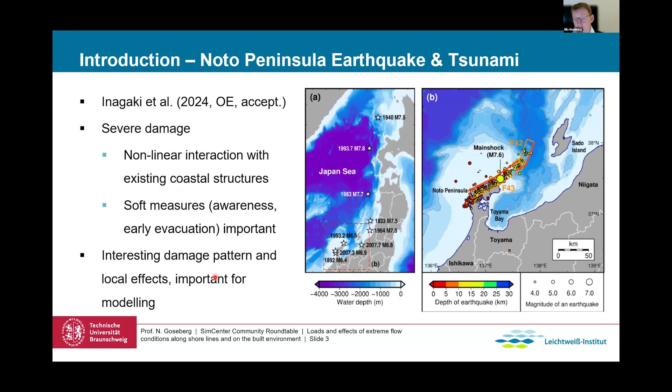Next picture taken at Ukai fishing port. I think this fishing port was also in the media quite a bit. What you see here is where the wave came from left to right, and led to some elastic or plastic deformation of that production facility. You also see a top-down house that was a residential building before, pretty much intact but upside down, and then it hit into that production facility.

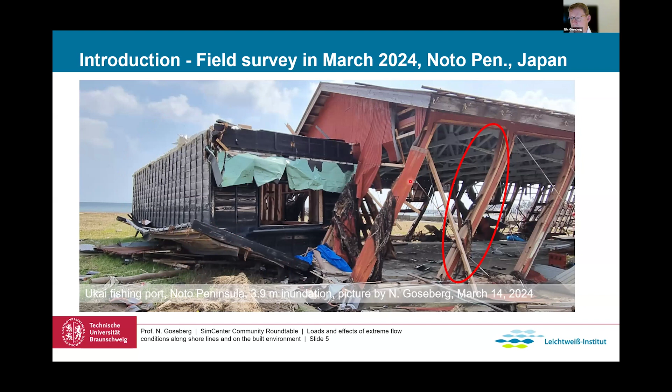So all of this, I think, is pretty important in terms of tsunami modeling. The quick section summary: the field evidence is important, and it needs much greater attention in order to bring what we find in the field into our labs. The built environment is far more diverse than what research currently covers.

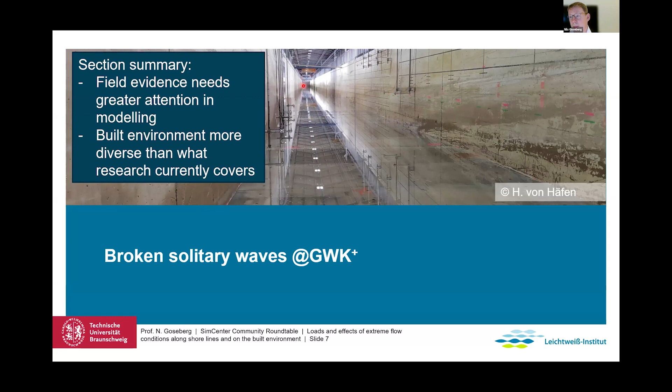That brings me to the first bit of research I wanted to share with you, using our large wave flume in Hanover to produce broken solitary waves. What you see here is a picture just downstream at the very end. You see the wave maker, and in the back of that photograph is a composite bathymetry that you will see next.

So the research was motivated by this kind of setup: consider a very steep mountain and a landslide, which results in a short tsunami, not the type of earthquake-generated tsunamis, but something rather short. We wanted to model the composite bathymetry consisting of a sloping beach and then a horizontal plane.

Method-wise, we used the large wave flume. In terms of producing the hydrodynamic features, we used a solitary wave that, by climbing up the slope, at some point broke close to the edge, and then propagated as a broken horizontal flow that impacted some buildings and features. Very quickly, this is about a minute of video showing what the facility is like.

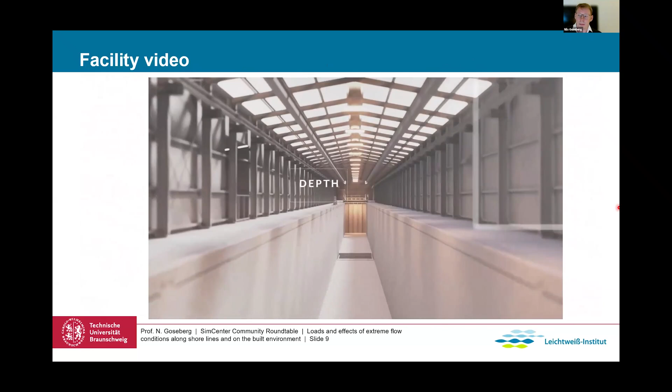A large wave flume, or large wave and current flume, since a year ago. It's a facility that we are flying through now; it's 300 meters long, 5 meters wide, and 7 meters deep. It is equipped with a wave maker at one end. You see it here in action, with a 7.5 meter stroke. It can generate 3 meter wave heights, and it's servo motor driven with active wave absorption.

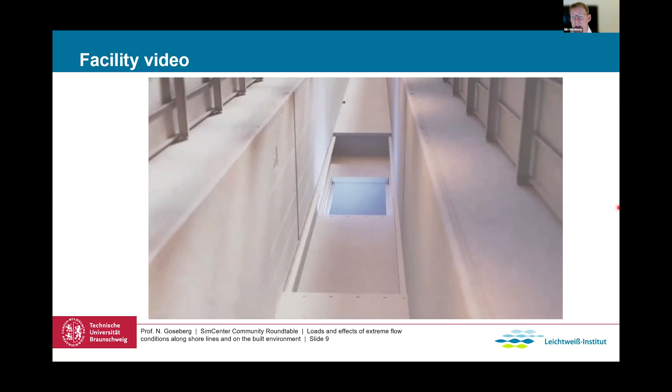Two other main features of the flume: first, a current generation system that can generate either following or opposing currents with respect to the waves. It's about 20 cubic meters per second discharge to generate a flow of maximum 1 meter per second. Last, we can also put structures into the flume in the so-called deep section. It's staggered, 2 meters deep in most parts, and up to 6 meters deep in the deeper deep section.

And we use this facility to do the research that I'm presenting today. Now, back to the research of Hajo von Häfen, the PhD student who led the work.

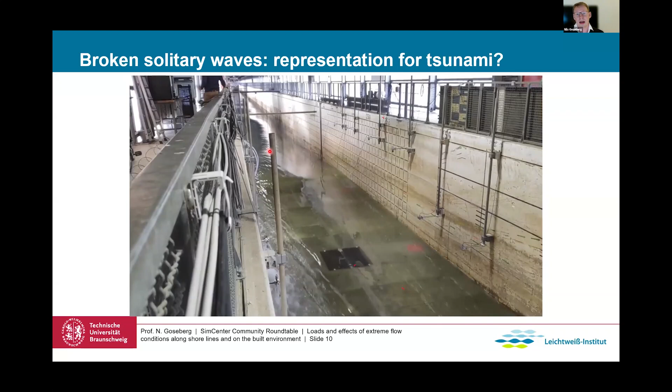I want to show you a video of what the wave looks like. You will see when I start the video that the wave is starting from here, a solitary wave shortly before it breaks. I let the video run. You can see the breaking process, and then after breaking, you see a sustained flow that resembles a tsunami on-land flow in our flume facility.

Just a couple of examples of the flow depth, surface velocity, and momentum flux. Some of these quantities we derived with sensors, wave gauges, but the surface velocity was derived from overhead cameras like this one. Images were stitched together, and then a surface PIV algorithm with popcorn, like from a cinema, was used at very large scale to produce these kinds of surface velocity maps.

If we then look at 3 different locations here on the right-hand side, you see the time history of the flow depths. For that particular test case number 6, up to about 20 centimeters at maximum, the surface velocity at 3 different locations - and you see this does not coincide with the maximum water depth - and the resulting momentum flux that you see here.

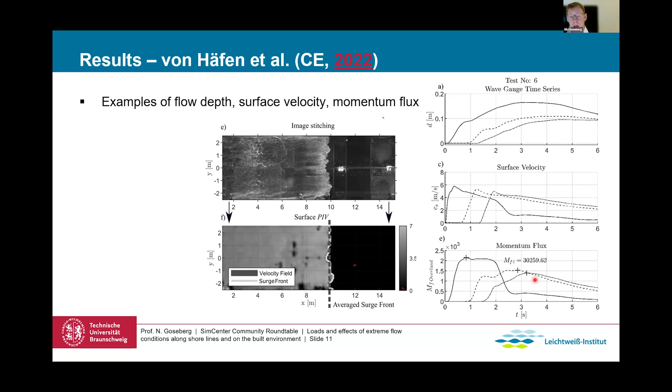It's also clear there is no coincidence between either maximum flow or water depths in that case. Because this was complex over that horizontal surface, we came up with some prediction equations that are summarized in the publication, both for flow depths (first equation) and maximum momentum flux (second equation).

And you see that both are dependent on the nonlinearity of the wave, the freeboard - that is the elevation difference between the mean water level and the platform elevation - as well as the coordinate x, the distance from the forward edge of wave motion.

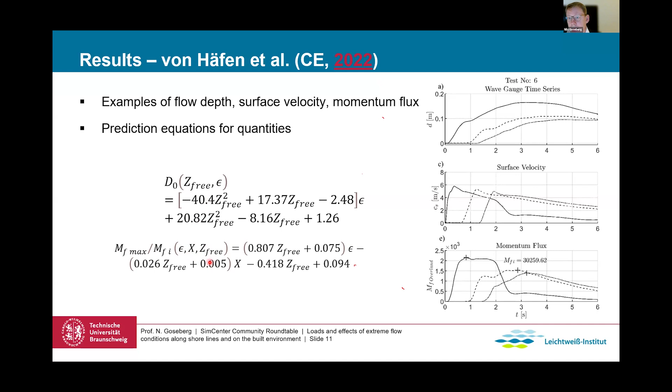So, quick section summary: the large-scale facilities help us produce data sets to model tsunamis and also provide data sets for verification of numerical models.

We have to admit, though, that the broken solitary waves in many cases are too short if we look at earthquake-generated tsunamis. For that, I'll show you at the end of my talk what we are doing or planning to do with respect to these longer hydrodynamic events.

Next part of the research is about extreme flow conditions and building specimens, based on two publications by Clemens Krautwald, another PhD student of mine and now postdoc in the group, who looked at the same hydrodynamic conditions I showed before, but now interacting with buildings.

This was motivated by the observation that in the field we often see collapsed structures, or elevated structures where the flow has a very different flow pattern than what we usually see.

If we look at the wooden buildings I showed in the beginning in Japan, there are still several knowledge gaps, in my opinion, with respect to debris production and evolution over a plane, and also momentum transfer. And with elevated buildings, we also have uncertainty about what happens if the building is partially elevated from the ground.

This also has some uncertainties with respect to uplift, loading, and so forth. Same flume - the large wave flume - two photographs of the specimen and what it looked like.

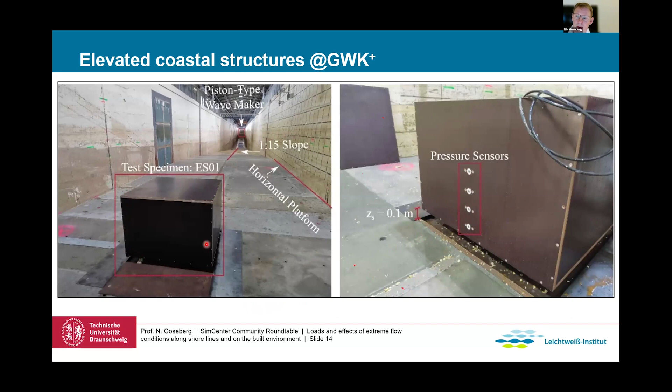You see here a slab-on-grade configuration on the left, and then an elevated configuration with 10 centimeters above the floor. You see pressure sensors, the whole structure, and I'll switch to the next slide.

The full structure was on a multi-axis sensor for load measurements. We had a couple of wave gauges and also an ultrasonic distance sensor for getting the water depth close to the structure.

The difference between slab-on-grade and elevated structure: if we look further offshore, we don't really see a difference, and I think this is not surprising - there's no immediate effect on the building with respect to offshore locations.

But it starts getting more interesting as we go closer to the structure, and you see that a little further away there is actually a bit more water depth for the elevated structure.

But when we go very close to the structure, we see that for the slab-on-grade structure, where the flow can't go underneath, it produces a huge splash up of about 1.1 meters, and a totally different time history of flow depths close to that location.

And if we go to the other side, the backward side of the structure, we see there is also a big difference with respect to the splash up that happens when we have the slab-on-grade structure.

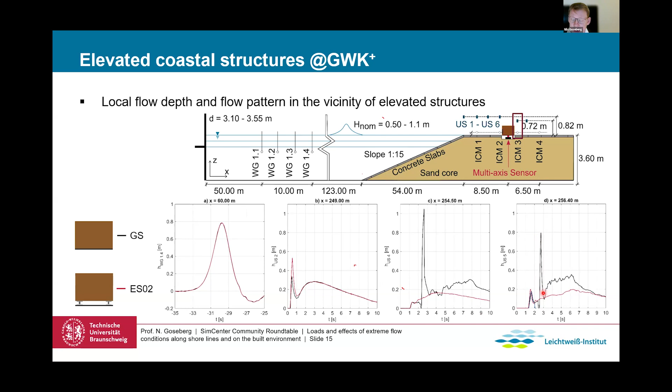So, very diverse flow pattern and spatial distribution, also temporal distribution of the flow depths. If we look at the different processes - slab-on-grade at the top and elevated structure below - you see that through this gap, the flow can just pass underneath.

For the slab-on-grade, we see a horizontal pattern of flow redistribution and shielding of the buildings in back. All this is, I think, very important with respect to the second and third row of buildings close to the coastline.

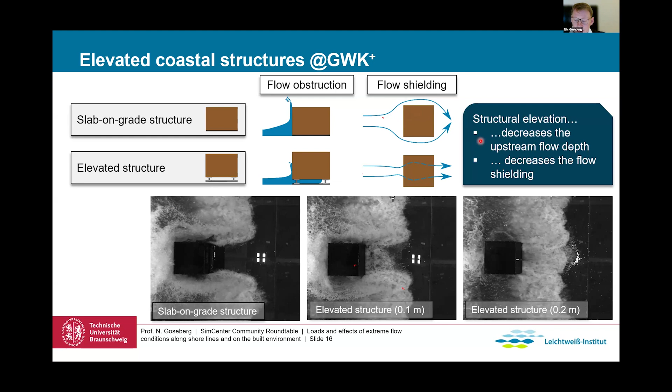Last, let me say a few words about structural collapse, since that was what the second publication was about. I'll show you three videos of three different collapse processes, which we were able to identify in publication number two.

First, there is one where the front studs of the box gave way - the box is scaled such that it can collapse. The front studs were giving way.

And if we look at the video, you'll see the wave coming in, slowed down a bit. First you don't see much, then the wave is breaking into the front, hitting the back wall, which is then pushed out, and the roof is failing.

And you see quite a bit of debris production towards the right-hand side.

The next collapse process we identified was an insufficient transfer of tensile forces, in particular at the backward side, with respect to the connection between the back wall and the roof. Quick video to show you how that looked like.

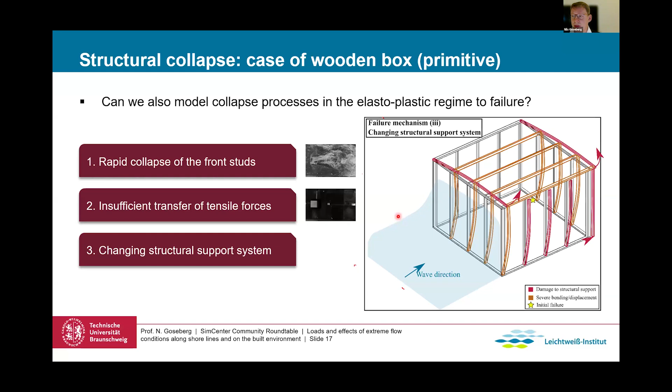Last, a change in the structural support system, and I think it's best explained if I show it this way. You see a rotational motion once the collapse is initiated, rotating torsionally around its vertical axis. Less debris produced, some of the parts are still hanging in here, and this was also a process we observed a couple of times during the experiments.

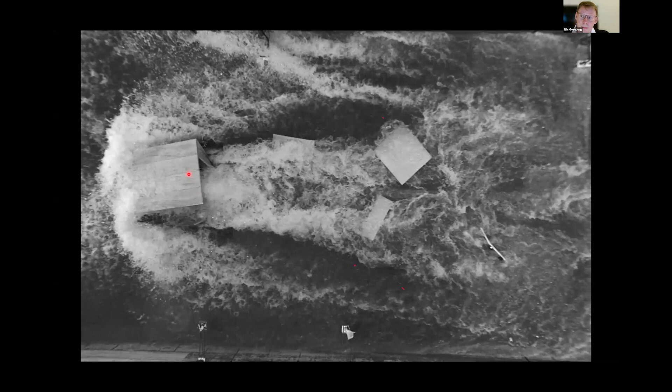Section summary: modeling collapse is possible. However, scaling considerations are still a frontier that need to be tackled next.

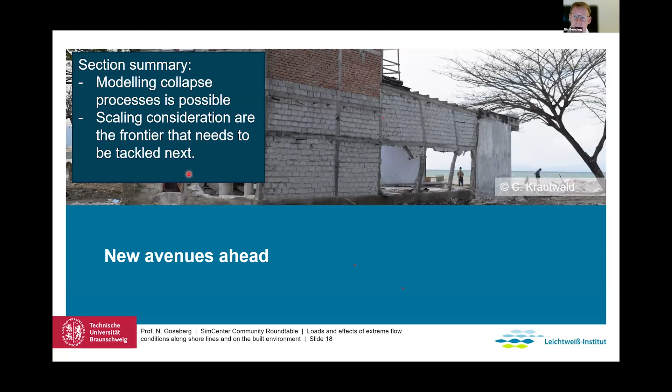Last quick two slides, and I'm done in two minutes, Mike. I hope this is okay.

So what is next? The avenue for the research program that is coming. The predominant problem, in my opinion, is that we need to simultaneously scale hydro and structural processes, which is a big frontier. And we also need to understand and compare physical experiments at different scales, say in mid-scale facilities and in large-scale facilities.

This so far has not really been addressed in research, and a requirement for this kind of question is you first of all need to have equipment in a mid-scale and a large-scale flume. So what is going to happen in the large wave flume is that we are purchasing a big dam break gate.

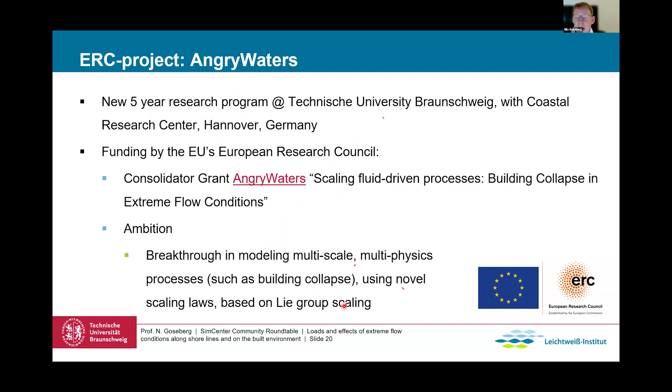Summary and conclusion. I think what I tried to show today is that combined modeling of fluid and structure processes is possible, it's feasible, as long as you have appropriate facilities. And the challenges, as I said before, are in particular in scaling tradition and the strategies between the different fields, structural engineering, hydraulic engineering.

Aside from the physical modeling, I think there is a big need for advanced numerical models, both for multiphysics and multiphase, as well as for more efficient fluid structure interaction. And with that, I'd like to thank you for your attention.

Well, thank you very much, Nils. That was very interesting stuff, and I think it motivates why we're here really well. So...

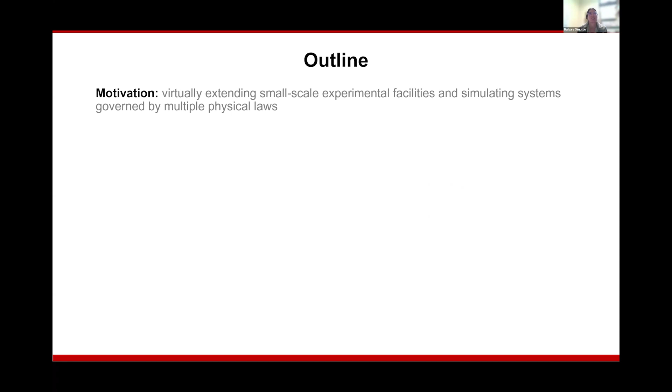I'll go into the motivation, which is the idea of having small scale experiments and simulating these systems that are subject to both fluid dynamics and potentially structural dynamics. Then I'll go into some applications we've studied so far, the unique data generated from that, and ultimately pose questions to get some brainstorming going in this session.

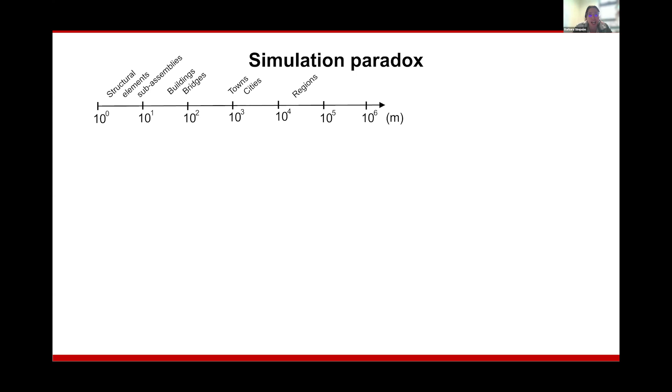So let's start with this motivation. The idea is: if we're going to use our experimental facilities, we're constrained by their scale and capacity. If we're looking at structural components, maybe we could simulate them at full scale. If we're looking at the scale of a building, we have to scale down. And if we look at regional models, we have to scale down even further.

Usually when scaling occurs, you're typically scaling the fluid flow, but oftentimes the structural dynamics is neglected, or it scales incompatibly with the fluid flow. This leads to the simulation paradox: we really need physical model data to validate our computational numerical models, but these physical models may not represent full-scale structural response of the actual structural side of the system.

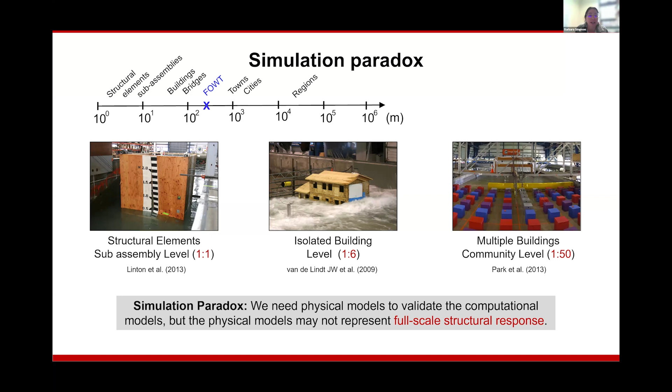I'm going to hone in on a very specific infrastructure type that NSF actually does not fund, but that's the floating offshore wind turbine. That's just because my group has done a lot of work in this area, and it's really subject to this simulation paradox, so it's a great example.

Floating offshore wind is a great example of a multi-dynamical system. It's subject to aerodynamics from the wind, hydrodynamics from waves, and structural dynamics involved with the tower, the blades, the rotor that actually rotates, and the mooring dynamics that keep it anchored. You also have controls that move the rotor and turbine to align it with the wind loading. So there's a lot of interacting effects going on here.

Luckily, if you're looking at say 10 megawatts, which is the estimated floating offshore wind turbine they're going to be building off the Pacific coastline, they're 200 meters tall. So they're incredibly large structures subject to a lot of interacting effects.

So when we think about scaling to look at them in our experimental tests, we want to scale them in geometry, but we also want to scale them in terms of dynamics. That basically means the relevant forces are scaled appropriately. The issue is that when you have these multiple dynamics involved, they don't necessarily scale together all at once.

Here's an example of potentially scaling the wind with respect to the Reynolds number, the structure with respect to inertial and elastic forces, and the waves or hydrodynamics with respect to the Froude number. I'm not saying these are the numbers you should choose - this is just an example.

If you look at a system subject to wind, wave, and structural dynamics, and look at that in terms of time and length - geometrically scaling down the structural system - you can clearly see there are incompatibilities between the governing forces, especially when multiple governing forces are involved.

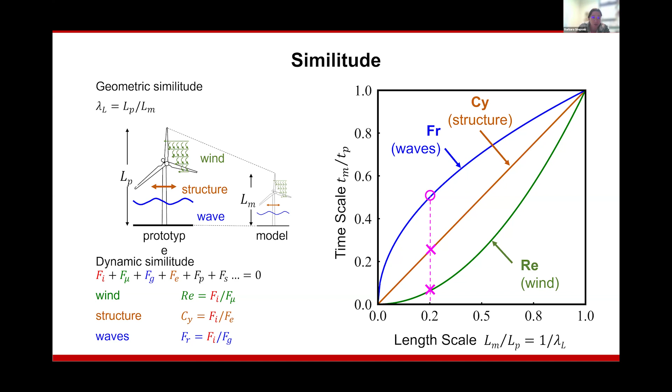There are a lot of these wind wave facilities all over the country and across the world. Not only do they have a difficult time getting a nice control volume near the rotor itself, you also have the wind and waves not scaled appropriately.

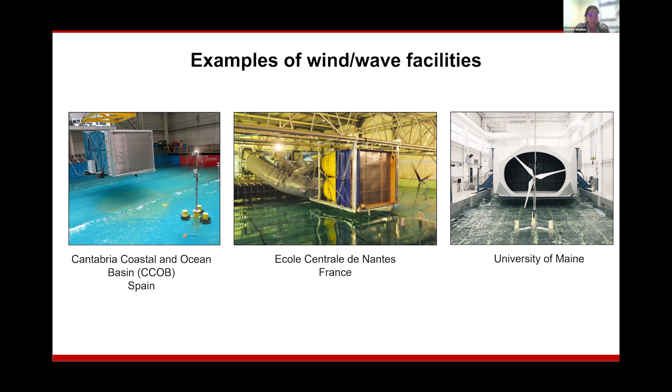Of course, the other side of that is maybe you just take your wind-only experiments and wave-only experiments and combine them in a numerical model, which can then operate at full scale, but comes with extreme computational expense. It's not necessarily clear it's been validated if the experiments only focus on one of the governing forces. So we get back to this simulation paradox question.

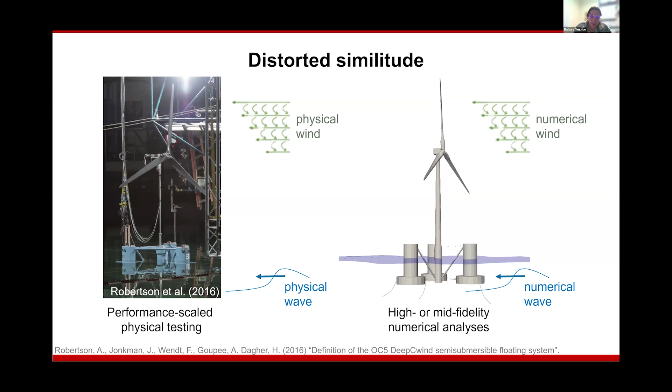It's that we need this physical data, but it's not exactly clear whether it represents a realistic response of these structural systems, because everything's done at model scale.

So what we've proposed is an online testing method, also referred to as real-time hybrid simulation. It's a testing method that's been around since the late 70s, early 80s, and more recently, because we've gotten so much better at computing calculations very quickly, we can now do these types of simulations in real time.

So what we can do is take this system with coupled wind, wave, and structural dynamic effects, and split it into two portions. For example, we have a numerical portion that includes some of the structural dynamics and wind, and a physical model that may include some structural dynamics, but also includes the hydrodynamics physically. Then we use actuation and sensors to ensure that we satisfy equilibrium between the two systems, as well as similitude compatibility.

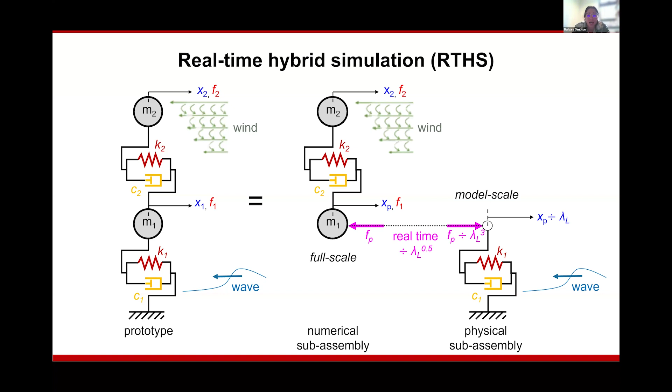So in this way, we could scale the governing force that we're interested in within the experiment, and then have that model interact with a full-scale system that has the remaining dynamics.

And so we've used this for a number of different applications. The first one is just a tsunami loading or solitary wave loading on a bridge pier, as an example, so that we could test whether this worked or not.

Something to note is that the bridge model can be at full scale, and then we have an actuator that scales down displacements and sends it to the physical model. We measure the corresponding forces, and that updates the numerical model. This all has to be conducted in real time, mainly because we can't slow down the fluid, so synchronization between these two portions is paramount.

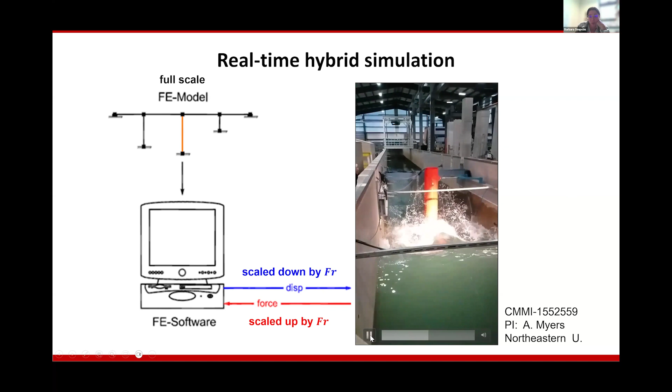And so we've done that for cascading earthquake tsunami effects. We've managed to do it on a three-span bridge where we can duplicate the wave loading on two bridge piers. We've even damaged the bridge prior to the tsunami loading to mimic cascading earthquake tsunami effects, in a test that we conducted in 2020.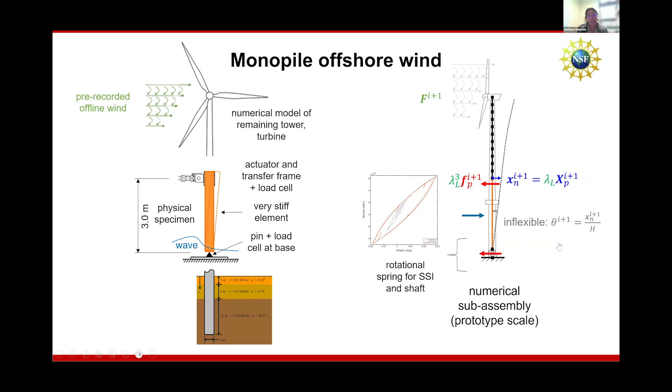Since then, we've broadened the applications we can address. We've looked at monopile offshore wind turbines, where we've partitioned out the soil effects, potential soil effects, as well as wind loading in a numerical model, which then interacts with the physical model, including the hydrodynamics.

We've also done it for a floating case, like what you see here, where again the wind loading is numerical and applied via a robotic arm in the physical experiment.

And finally, something we're doing right now is virtually deepening the wave flume at Oregon State University. You can imagine using a series of motors and/or cables to emulate mooring lines that are significantly deeper, to represent what's happening off the Pacific coastline.

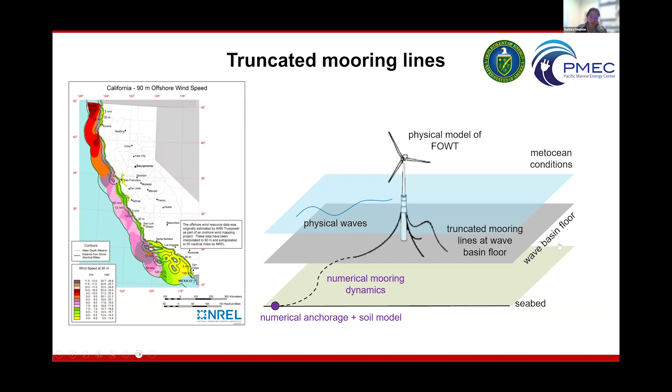And so we have a lot of data. Then it becomes this question: if you have data that now includes fluid structure interaction effects, what do you do with it? So here you can see some differences.

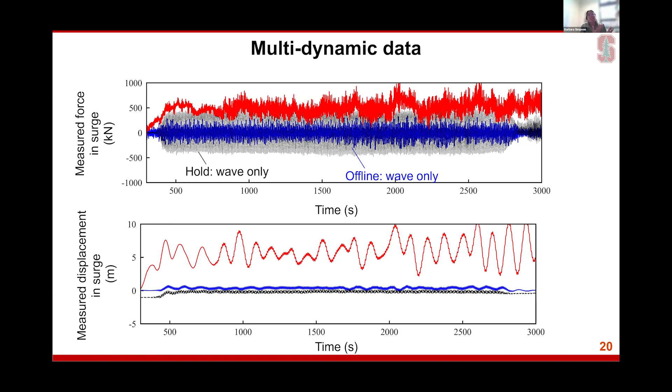This is for the floating case, including wind along with wave loading. In some cases, we just hold that turbine fixed and let the waves crash into it. In other cases, we just let the wind turbine follow the wave loading. And in another case, we actually add that wind loading. You can see that the wind loading applies an additional effect, and because the system is floating, it moves the entire system in a quite substantially different way when you have all of that acting together.

So let's take a step back and think about what we could do with some of this test data. Something we could do with hybrid simulation is think about how the structural dynamics affects the fluid loading, be it with a two-way effect or a one-way effect, depending on the degree of coupling between the wave loading and the structural dynamics.

So what we did is emulate a single degree of freedom system model. Here you can see this black line representing the structural dynamics due to a solitary wave, which, if we play around with the similitude distortions, we can get the structure to interact with the wave in different ways.

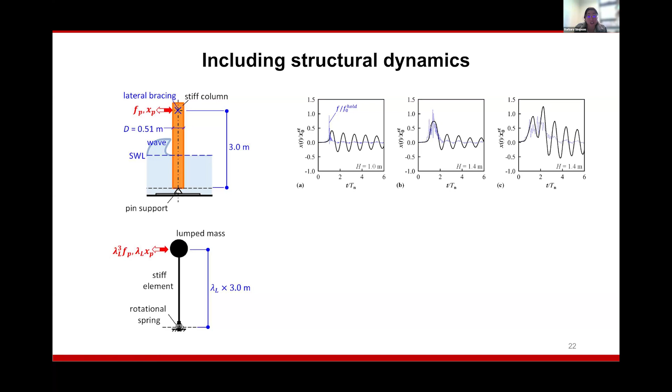Depending on the frequency of that structure, we can actually get this sort of double-peaked structural dynamics effect, or oscillations that occur during the duration of the wave loading. You can imagine using a system like that to study the degree to which structural dynamics starts to matter, and then try to emulate it with a simplistic triangular pulse loading, mimicking that effect in a mid-fidelity way that could be useful for codes or something similar.

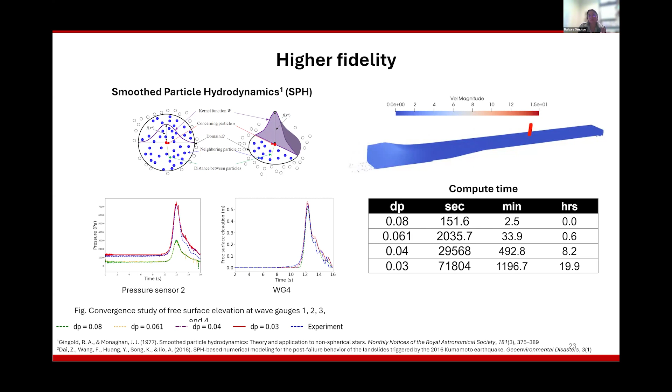We've also sought to understand it via higher fidelity models. This is a model using SPH, where we've managed to mimic the case where there is no structural dynamics relatively well. We're starting to look at the case with structural dynamics too, and you can see that very much depends on the degree to which you model the fluid itself, with computational time increasing the more high fidelity your fluid model is.

As you change the resolution of your fluid, we go everywhere from 2.5 minutes, where it's not really representing the pressures as well at all compared to the experiment, to something like 8 hours being the best case, and then 20 hours being a very high resolution model.

That leads to this last component we've started looking at: given the computational expense of these models, maybe we should think about emulating them in a slightly different way, given you have enough experimental data or high fidelity data. In this case, we're using the particle finite element method developed by Minjie Zhu and Michael Scott at Oregon State, and we're thinking about how we can model the fluid, say using a graph neural network, to represent some of the characteristics we're seeing in these numerical models.

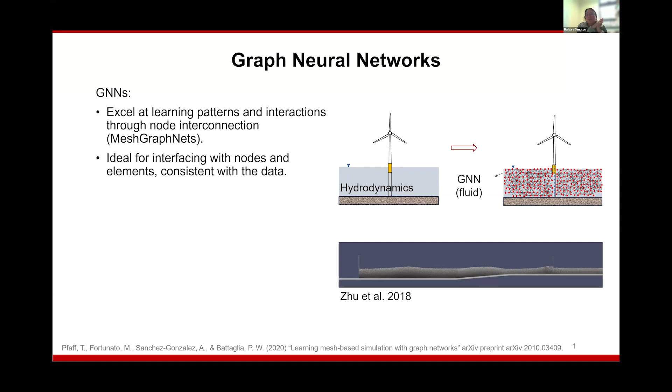Once trained, hopefully those models run significantly faster, and we can start looking at things like uncertainty propagation or risk, or whatever the case may be, given that the model runs significantly faster.

That leads me back to this question: when does FSI matter, and how can we think about it in terms of this similitude paradox? You're scaling down all of these forces, and they're not necessarily compatible with one another.

Just what I've been looking at in the previous slides is: if you have a physical experiment, maybe you can just look at the waves, or you might be able to look at waves and wind if you distort the geometry. Then this hybrid simulation approach allows you to virtually expand upon the dynamics that you're able to address, and you can think of that sophistication of the simulation being increased. But I want to be clear, that does not mean that this simulation represents reality either.

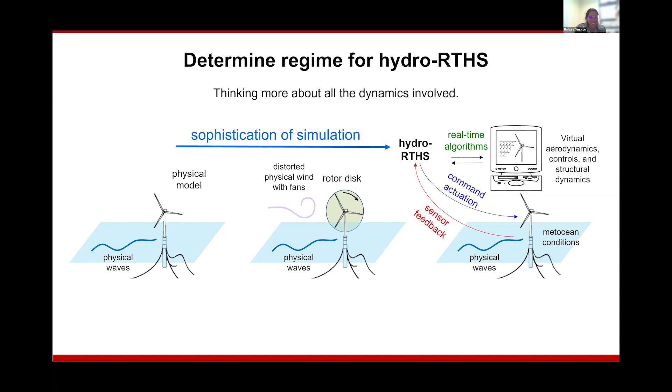I love this quote that I'm sure everybody on the call has heard: all models are wrong, but some are useful. A lot of what my group has been thinking about is we're doing these complicated things, coupling numerical models with physical experiments. But when do you need that? When does the fluid-structure interaction effect matter? And that in itself is still a model, so how do you validate it?

I'm just going to list a couple of questions that hopefully spark some brainstorming and discussion. Thinking about validation of these systems is kind of difficult, because if you have physical experiments of one or a few of the governing forces, then you might have hybrid simulation on the other side of that. But the hybrid simulation also involves a numerical model. In the slides before, I've shown the wind—so how do you make sure that wind is actually modeled appropriately, or if the structural dynamics are involved, how do you actually validate this coupled experimental numerical model?

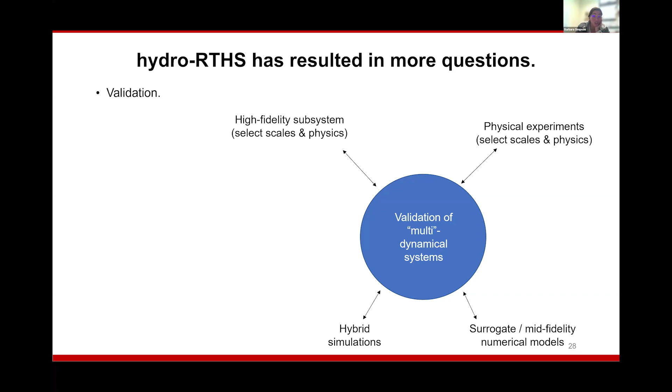You could imagine doing high fidelity subsystem simulations of portions of the full system. You could think about having surrogates involved to look at differences between all the models. You can leverage advances made by the Department of Energy in terms of exascale simulations, and then everything gets cross-validated against each other, and hopefully you converge on something that's about right.

Validation of these systems becomes complicated because you can't rely on just the physical experiments of one force to validate other parts of your system. You kind of have to use full system models for a select few cases, maybe mid-fidelity models for more non-extreme cases, and then combine them all into something that gives you an appropriate validation data set.

These things also take a lot of expertise in disciplines that aren't necessarily classic civil engineering knowledge domains. For example, we had to learn a lot about robotic arms to implement this. We also had to use linear wave theory, even though our background isn't fluids, to help the robotic arm emulate the wave loading better and enhance the control scheme of this system.

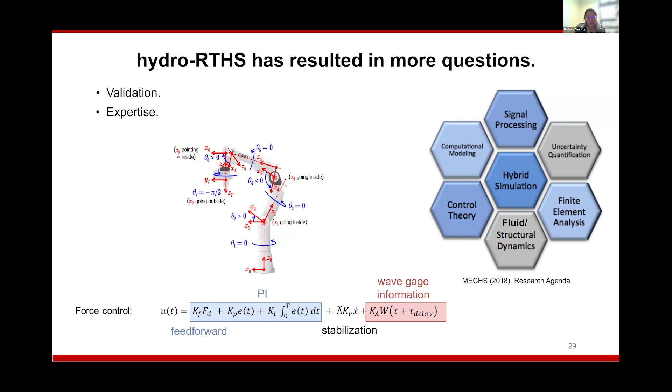And even more than that, you get to this question of fidelity. Now you're adding more components to your physical experiment. Ideally your actuation scheme and sensor measurements would all be invisible to the loading, but you have to have a very robust, responsive control scheme to make that feasible.

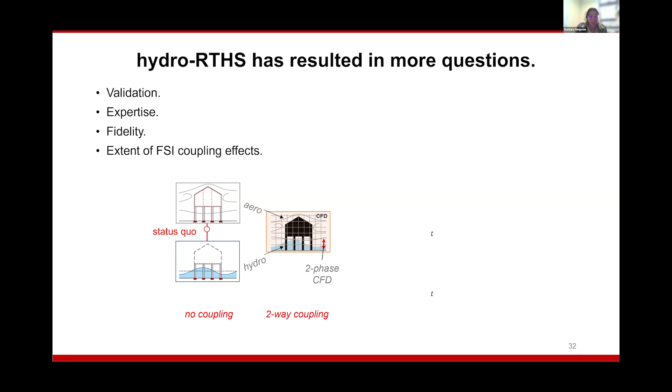There's also this idea of what is the extent of this FSI coupling effect. For example, here's an elevated structure subject to wind loading as well as wave loading, say on the East Coast of the United States. Typically we would experimentally model these two loading types separately, but maybe the wind and wave have an interaction coupling effect, so we might want to consider two-way coupling.

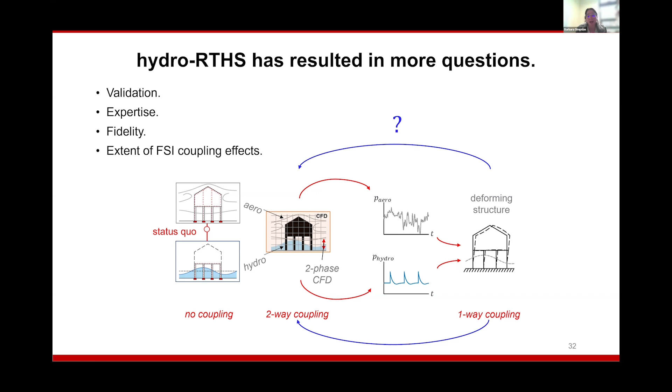There's also the actual effect these forces have on the structure, and I think there's still an open question on how much that effect is one-way versus two-way. What we've seen in a lot of our experimental data is that even when we hold our structure fairly rigid, it still tends to vibrate, which affects those peak pressure coefficients. So there's a question of how much the deforming structural characteristics actually matter within the loading. Common sense says the structure deforms so little it doesn't matter much, but there are definitely regimes where it might matter more than others, and we need to identify what those regimes are.

And then for the case—how am I on time? Am I just, I kind of got distracted. You're good for a couple more minutes. Perfect, okay, I'm ranting.

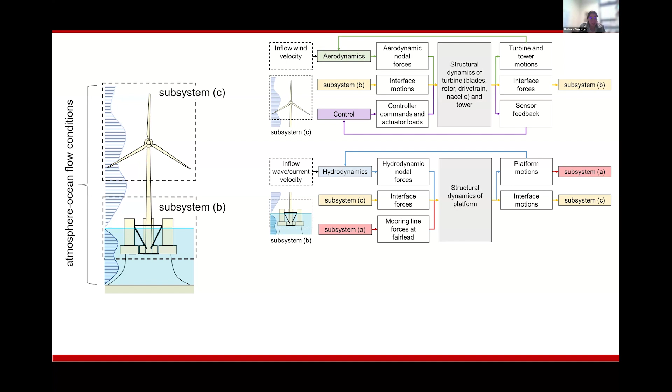A regime where this matters a lot, for example, is the floating offshore wind turbine case, where you have subsystem C representing the wind loading on the rotor, along with the controls moving the rotor into place. That interacts through the tower dynamics with what's happening at the platform and the hydrodynamics, which might also interact with another subsystem at the seabed floor, including the anchorage, soil effects, and mooring lines. In this case, the interaction components might be quite large and become even larger as these systems undergo more extreme wind and wave loading conditions and displace more.

But going back to the previous slide on the elevated house, maybe that doesn't matter so much until you get an opening that appears in your structure, and then it matters a lot. So there are these regimes that I think we as a community need to be clear about—when these interaction and coupling effects become two-way versus one-way, versus when we can just model them separately, superimpose them, and it's fine.

This last slide leads nicely into the next presentation: a lot of how we do these hybrid simulations involves taking our numerical model and applying some similitude law to it. We assume our hydrodynamics, for example, are governed by Froude number, which applies for open channel flow. But as we get wave breaking processes, it's not exactly clear whether that similitude is actually appropriate for something significantly different than just gravitational and inertial forces.

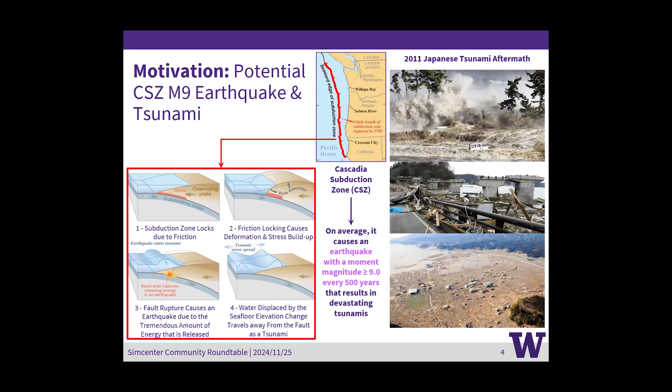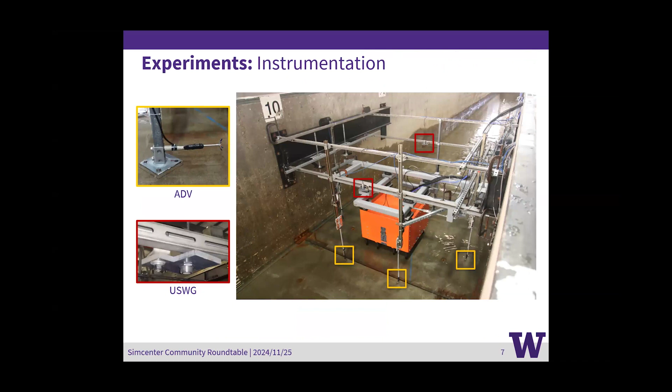So we went down to OSU back in 2017 for the experiments, using the large wave flume there. We had a wide array of instrumentation: ADVs for velocity, ultrasonic wave gauges for wave height, pressure gauges, and some small load cells inside the structure, as well as large load cells outside the structure to get XYZ forces on the whole body.

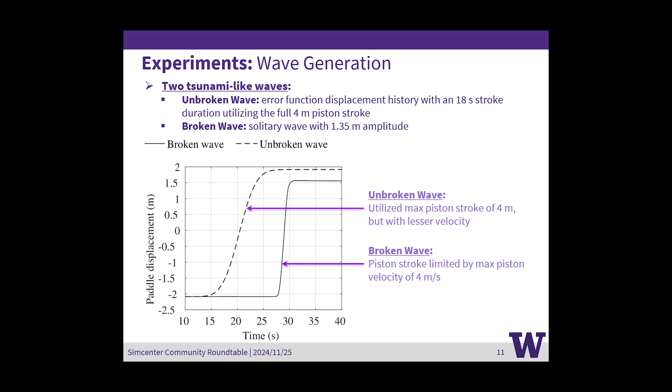And then we studied an array of different structures where we have the wave hitting this concrete block, which was our neighboring more offshore structure, and then our steel test structure was farther downstream. So we measured the loads on this for two different wave types. We did a broken wave and an unbroken wave, although the truly more tsunami-like one is really the broken wave. So that's what we chose to focus on after the fact, even though we had a large amount of unbroken wave data.

Let's see, get this to play. Skip ahead a little bit so you can see the interesting part. So this is one of the broken waves impacting the test structure. Some of you may have seen this before, but if you haven't, it's pretty cool.

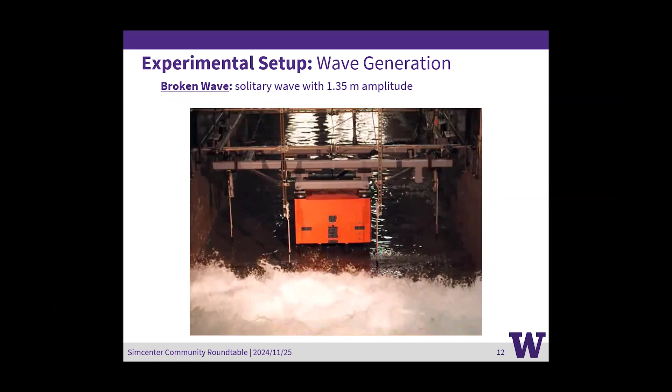But this is what we were trying to mimic with OpenFOAM modeling after the fact. And you can see the big difficulty here numerically is this free surface. Is this really a smooth free surface? No, this is a giant mess. So trying to use VOF, volume of fluid method, which really needs a smooth surface and a very, very fine mesh to do this kind of thing, is maybe not the most ideal, but on average it still works out pretty good, is what we found.

So you might think SPH or MPM or something else would do better with these giant splashes, but traditional CFD finite volume methods can still survive and get you good results.

So these are our experimental results. We got a pretty good match between the load cell and the pressure integrated over the surface, the green and the purple curves, for all the different cases. And for all cases, both were well within the range of variation from test to test, the gray curves, of which there's many superimposed.

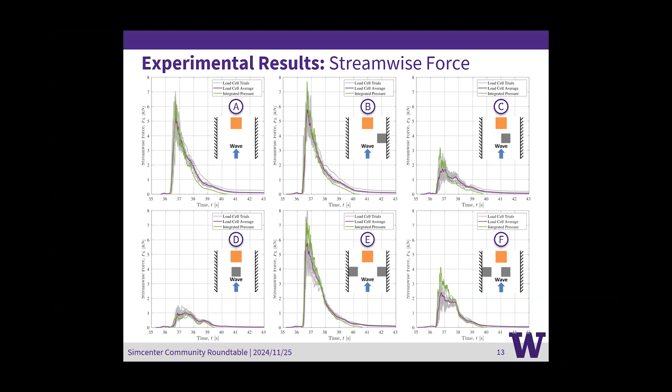And you can see the effect that moving the block from the wall towards in front of the structure has. You gradually, for case D, get a massive reduction. For case F and E, you get kind of asymmetric reductions, in case B as well, and especially C. And some amplification as well, right? Like case F has very high force on one side, but very low on the other.

And if you're wondering why the graphs look a little funny compared to the images, they're flipped. This is left over from my PhD defense. So the left and the right are flipped from pressure surface to orientation of the blocks.

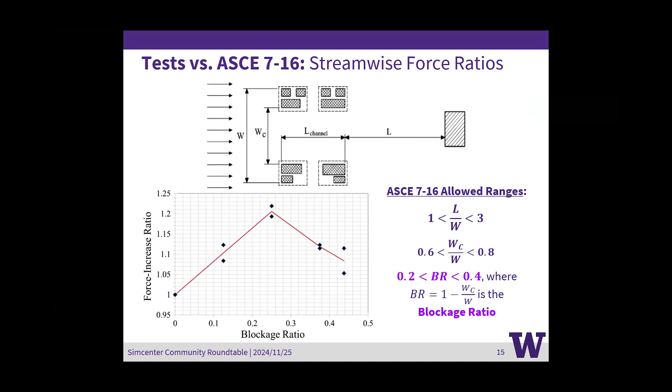So we compared this to the blockage ratio provisions in the code, where the blockage ratio is limited in a certain range, but we expanded beyond that. We went to higher values, and we showed that for cases where you don't have any blockage of the structure, A, B, and E, things worked out fine. But when you have severe blockage of the structure, C, D, and F, you get way, way lower results than the curve in the code provides. And this makes sense because it's not really attempting to handle such a scenario.

So that's why we were trying to expand our model to go beyond this. So we used OpenFOAM as our CFD tool for this, to try and model the fluid flow around these blocks.

And we used a finite volume code, Reynolds Averaged Navier-Stokes, but not the steady one, the unsteady one, so you can actually have variation in time. And we used an add-on wave generation package, OlaFlow, by Pablo Higuera, which is a very helpful tool. I'll talk a little bit more about the turbulence modeling in a minute.

And the meshes weren't that big. They're only 4.5 million, which by commercial standards is nothing. That's pretty tiny. Maybe in research world it's big, but you can run a lot of those very fast on a big cluster.

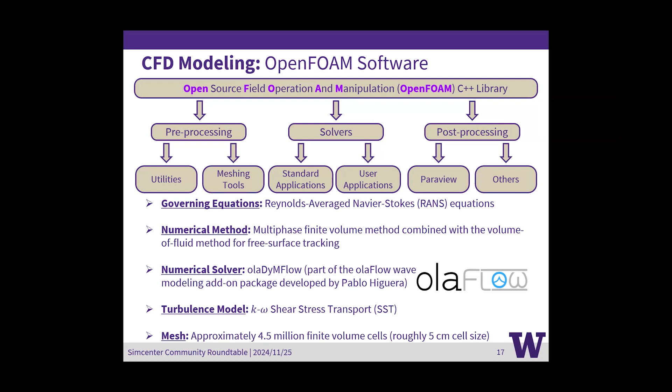So we did a lot of experiments with Reynolds stress models, K-omega models, and found that the K-omega SST model performed the best out of all of them. And this is pretty in line with industry as well. It's one of the most popular ones to use because it handles flow separation very well.

It also doesn't have the same problems that a lot of K-epsilon models do, where it builds up spurious turbulent kinetic energy in stagnation zones, like say on the front of the structure where the wave is running into it. That could be a big problem.

The Reynolds stress model could have done better if the initial condition was probably better, but at the time the initialization I was giving it was perhaps not the best. A better Reynolds-averaged Navier-Stokes initial state could certainly help, but that's sometimes difficult to do.

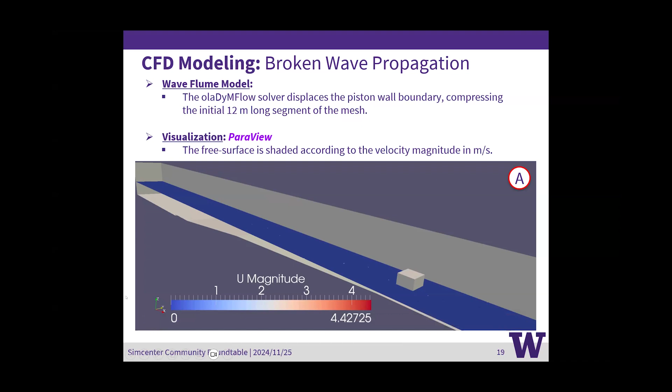So this is what we ended up getting in terms of our simulated flow behavior. My video will play... no, okay. Well, that's too bad, I'm not sure why the embedded video is not playing. I tested it beforehand. Anyway, let's try the next one.

Here we go. So this is the wave coming in and slamming into the structure. You can see that's not nearly as choppy as the actual experimental video, right? So you get a more averaged out smooth flow by doing this volume of fluid method, where you have a fixed Eulerian grid that doesn't refine itself. You could use adaptive meshing, but we found at the time that adaptive meshing was not at all necessary to get the quality of results we were getting.

As you can see, the OpenFOAM results match the experimental results quite well. The green curves are all lying within the gray band of values, and the peaks match pretty well as well.

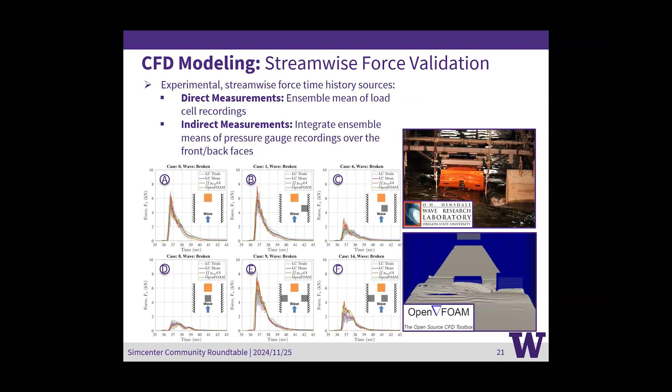So what we did with this data was we expanded it. We did a parametric study, a lot of different values of positions of the neighboring structure, the NS gray block here, and we were trying to quantify a blockage to get an effective force ratio that reduces based on the position of the block and its proximity to the design structure, that would be experiencing the load due to the flow channeling or shielding.

And so this is basically just doing some geometry to figure out how much of the channel width should be chopped off and put into the calculation of the blockage ratio.

So we did a bunch of different cases here. You can see them ranging from lined up exactly, to against the wall, and we moved them near and far away along the channel as well, for well over 200 to 300 cases in total, I think. We also varied the width of the channel, just in case the finiteness of the walls was potentially an issue, which we found out it didn't change things very much.

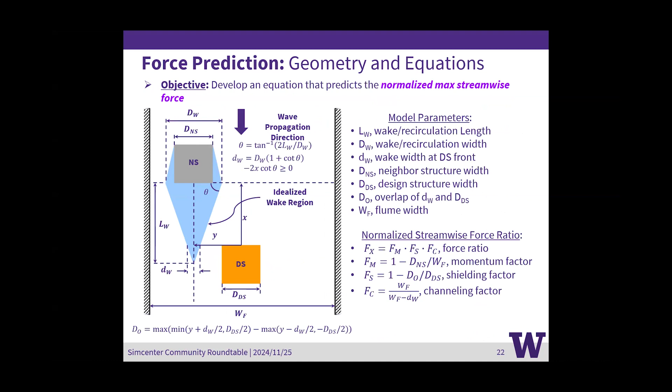We got basically the same optimized values here for where we were trying to optimize the width of that wake in this model and the length of it as well. The DW and the LW were being multiplied by the size of the structure to get the actual value.

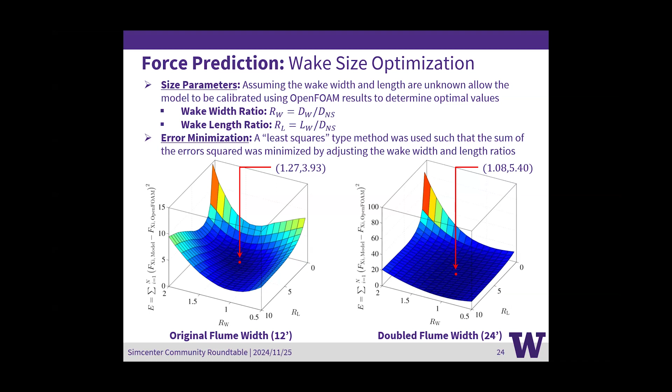Currently, I am trying to use some of my old data from this and remodel it with Simcenter STAR-CCM+. My first attempt, which is not super refined, came out pretty darn good, and the amount of effort I put into this compared to OpenFOAM was massively smaller.

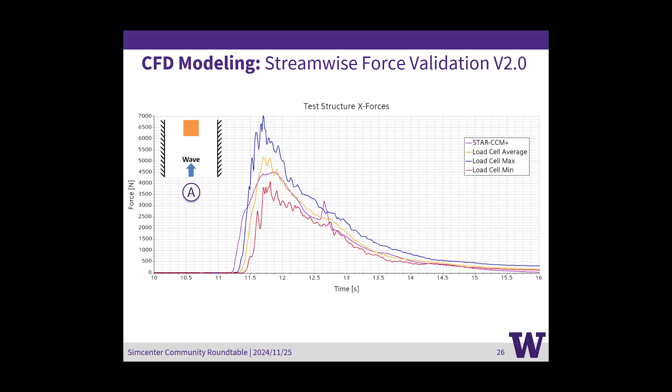I think I spent an afternoon setting up a model, submitted it, checked it the next day, versus several years of trying to master OpenFOAM. So I think the user friendliness of StarCCM Plus and the robustness of the built-in models is definitely a huge benefit to consider for the community.

Some more recent stuff that's been going on, we worked with student Nikki Lewis, and Justin contributed to this as well with some results along with myself. She was looking at coupling OpenFOAM with OpenSees using the preCICE coupling library.

You can see here she was doing an FSI coupling loop with the preCICE tool being the link in between them, where you're iterating back and forth between doing your unsteady RANS simulation of a VOF model for the fluid flow, and then your finite element model for the structure. This is tricky because there's a lot of effort that has to go into mapping back and forth between a 1D line model for a beam or frame element versus an actual solid mesh in 3D space that's in the CFD model.

There's no direct way to couple them, so Nikki's work was primarily aimed at developing the means to transfer these loads back and forth between each other. You start with the pressure from the fluid, map it onto nodes on the mesh, then map them as forces onto the frame elements. The frame elements deform, and then you remap that back to get an updated geometry for the CFD model. You keep iterating like this until you converge every time step, and just keep stepping through time.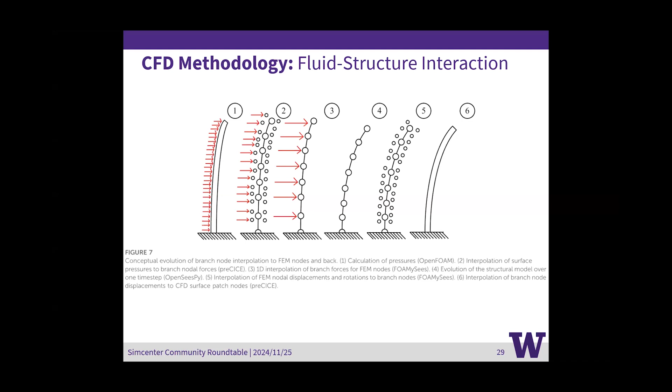So what we did with this was a validation with a flexible wall and a dam break model, which is sort of a classic thing to do. We compared Nikki's FOAMySees combo of OpenFOAM and OpenSees to StarCCM Plus and Justin's Claymore material point method code that he's been developing with Pedro Arduino.

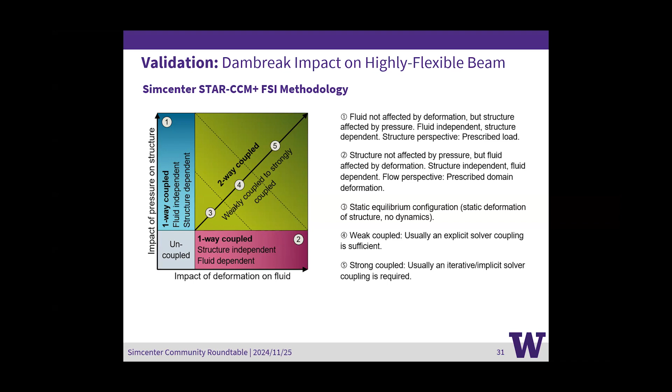To give a little more background on StarCCM Plus in terms of what I was doing with this. This is definitely, and thinking about what Barbara was saying, a very two-way coupled problem in my opinion. The structure is deforming so massively that the fluid flow is going to be redirected and vice versa. They have a strong impact on each other, so you're not going to get a one-way coupled situation here, either fluid-independent or structure-independent.

To give an overall map of how I would label something in the FSI world, what's done in StarCCM Plus is you have a Lagrangian frame finite elements for the structure and an Eulerian frame finite volume for the fluid. They used to have all finite volume, but developers found finite element method is much more robust in general for the structure, so the code has moved to do that instead. This is all in one software, you can run these models together and do FSI all in one program, which simplifies things massively.

Additionally, if you need to, you can use overset meshing, mesh morphing, remeshing, all kinds of different capabilities to distort the mesh. This is a very extreme example I took from one of our marketing things, where you've got a hummingbird's wing flapping.

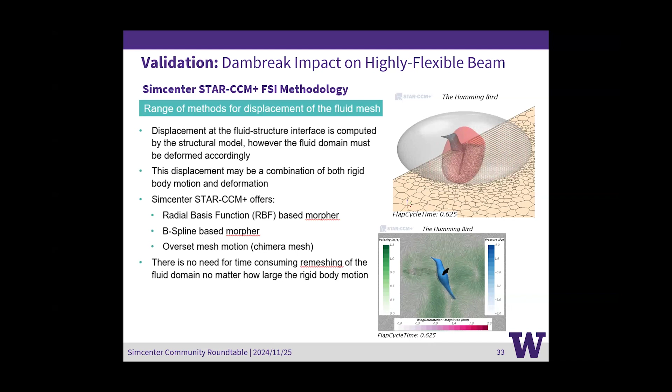In my case, I was using the RBF morpher. You can do just about anything in Star for FSI. Just to give an overview of what kind of applications we're doing in research and industry with this - basically, the sky's the limit, I would say.

So what kind of results did we get out of this? We got a pretty good match between Walhorn, which is an original all-FEM monolithic solver for both the fluid and the structure that they created back in 2005, and then Nikki's FOAMySees and my StarCCM Plus. You can see qualitatively, at least, the free surface matches well at multiple times throughout the simulation, even during splashing on the wall.

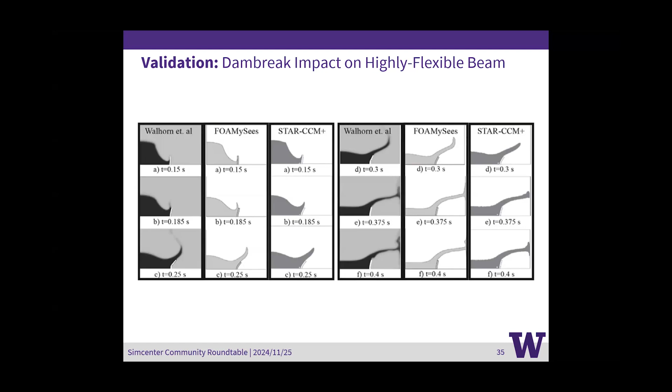How did the results for the deflection turn out? Pretty good, I would say. Everything overlapped quite well. The original result by Walhorn was slightly lower than the FOAMySees and StarCCM Plus results. The MPM code was a little bit higher, a little more flexible, as were several other PFEM codes that are compared here. But overall, we were very happy with the accuracy of all the codes lining up pretty well.

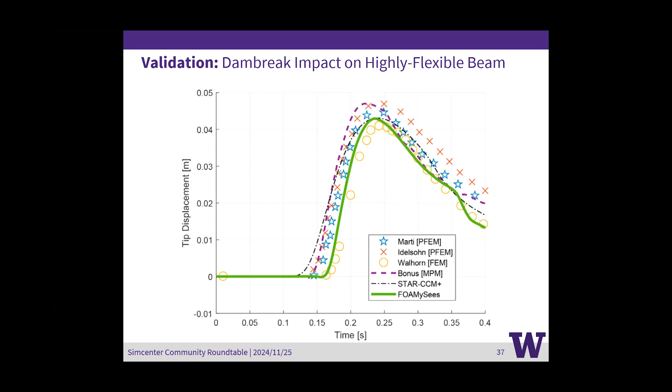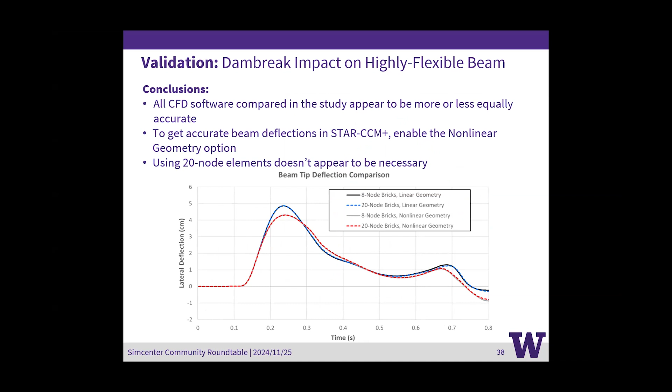A little bit of additional findings we had: to get accurate beam deflections for such a flexible structure, you have to enable the nonlinear geometry option in Star, but you don't actually need to use higher order elements - you can get away with regular 8-node brick elements.

Nikki also did some validation against tests done at OSU on a concrete-filled steel tube column vertical evacuation structure. Again, there weren't displacement measurements coming out of that test in the same way as you'd get from the numerical simulation, but the force measurement matched remarkably well, showing that this coupling method does indeed work quite well. Even though the displacement wasn't large, this FSI methodology can still reproduce basically what you'd get from a pretty rigid boundary situation.

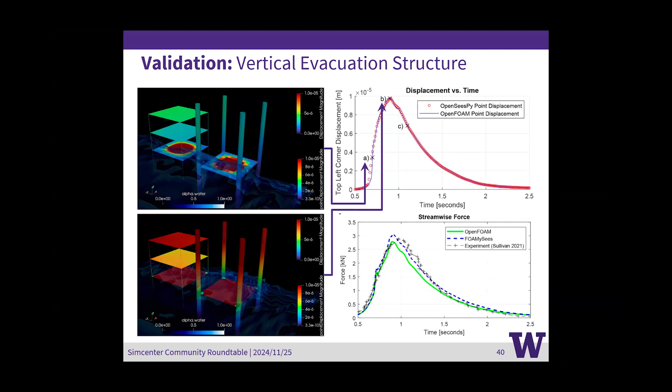Just to cover a little bit of what we've been doing most recently with Nils and Justin and company. We've been modeling debris being driven by a dam break wave impact from tests done in Japan some time ago. I'm taking a hybrid multi-phase approach in STAR, where you can combine numerical methods in any way you imagine, but you want to pick something that depends on the applicable regimes.

For the stratified flow with air and water, I went with the VOF method, the volume of fluid. For the actual debris particles, I chose the discrete element method, which is better than the Lagrangian multi-phase method, which has point particles that can bounce off boundaries but their actual radius or boundary does not matter. The DEM model is powerful enough that it can allow for arbitrary shapes.

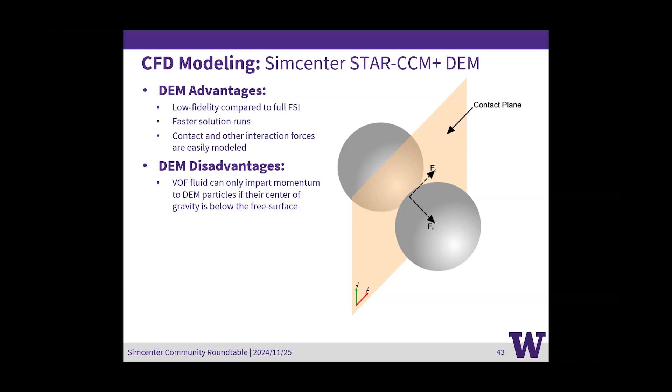So I was able to make rectangular blocks like in the original test. Some of the advantage of this is you can do very low fidelity compared to full FSI. You don't need a whole FEM solver or contact modeling in the same level of detail, so it leads to faster solution runs, and all interaction forces are simple to model with this particle-based method. But the one big disadvantage is that in the current STAR implementation, the VOF fluid interacting with the particles only occurs if the free surface passes through the center of gravity. If it doesn't, the fluid can flow through as if it doesn't exist. This leads to a reduced distance traveled, as I'll show in a couple slides.

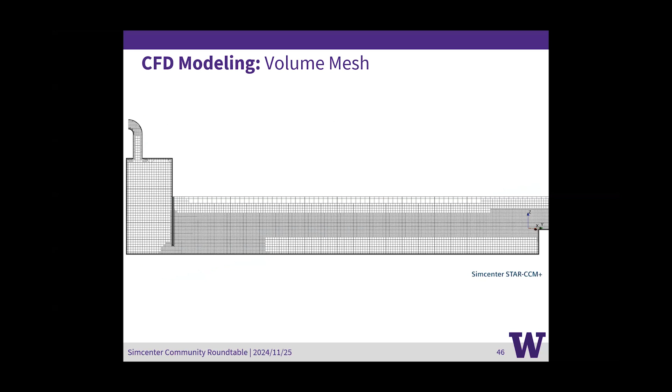I'll skip my little video demonstration. This is the wave basin we were modeling. I modeled the full thing, including the pressure valves. This tank in the back holds the water, and it's released as the pressure valves let go, and the wave translates across the domain. Here's a cross section of the mesh. The water fills the reservoir at the left and then drains out under the sluice gate to create a dam break-like wave.

One thing I studied was it was a bit difficult, based on the original paper, to ascertain the exact conditions in the air valves versus the sluice gate. So I did some study varying the height of the sluice gate as well as the pressure in the air valves. We ended up settling on the same height of the gate, and then playing with the pressure in the air valve ended up helping get a more accurate free surface result down the line.